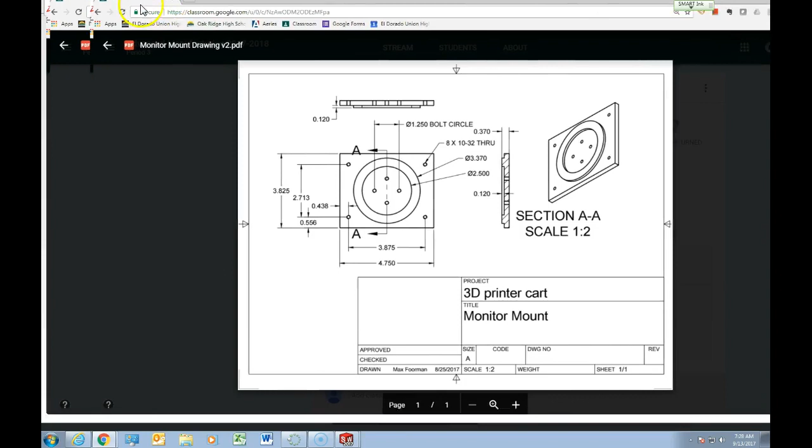So I'm going to assume at this point you know how to open Solidworks. I've opened it here previously. I'm going to do a new part, and I'm working on the monitor mount for right now.

So right now for me, all these are turned off. I recommend at your novice level here, right-clicking on each of those and clicking on the eyeball to make all of these visible. So again, right mouse button on these, clicking on the eyeball to show those things.

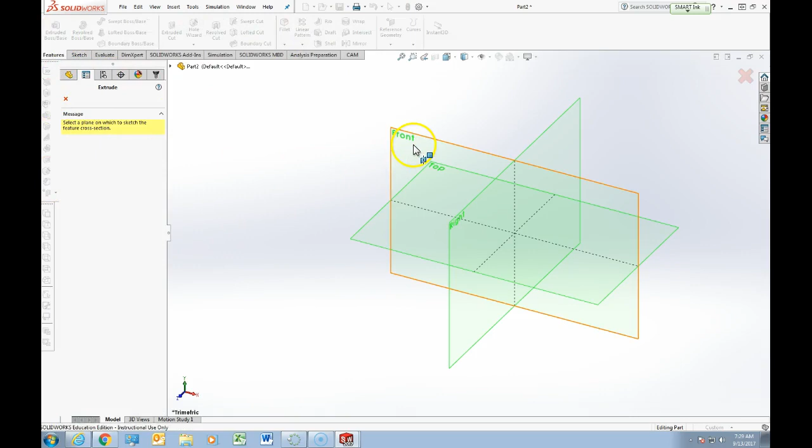The origin's there. So what I'm going to do now is click on Extrude Boss Base off the Features tab. So any of these tabs here, I'm clicking on Features, Extrude Boss Base, and I'm clicking on Front Plane.

Okay, start off here. It's now in sketch mode. That tab opens up. You've got these two icons showing you that you're in sketch mode. I'm going to sketch a corner rectangle. You've got other types of rectangles, but corner rectangle to start is just the easiest to use.

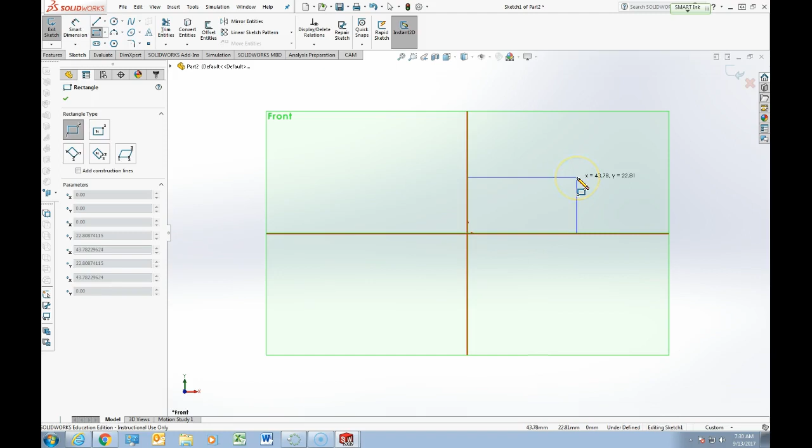Notice how I'm hovering over the origin point right there. We've got a little yellow relation thing we'll talk about later, but going from the origin up and away. And I made a little mistake here to start - you're going to see that my units probably aren't completely right. I'm actually in metric units here.

So let me restart this. I'm going to exit out of this sketch. Custom units down here - inch, pound, second is what I want to be in, and so should you. So you may have made that mistake too. Inch, pound, seconds is where I want to be.

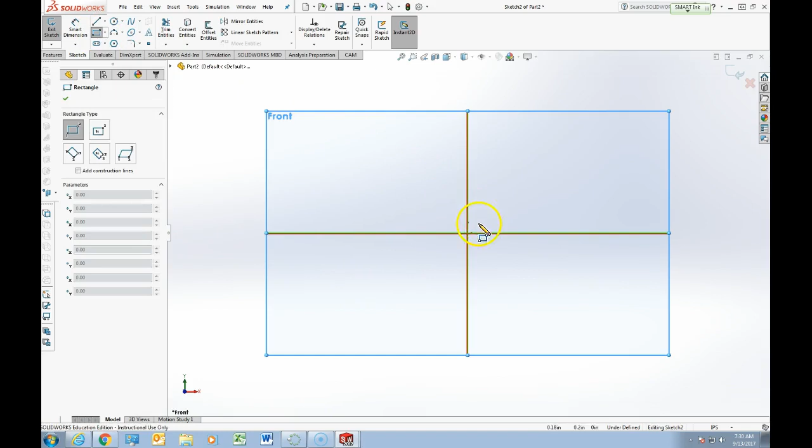Now starting over again: front plane, Extrude Boss Base. Come here, click. Come up here. I don't particularly care where I clicked. That was one click and then two clicks over here to get that.

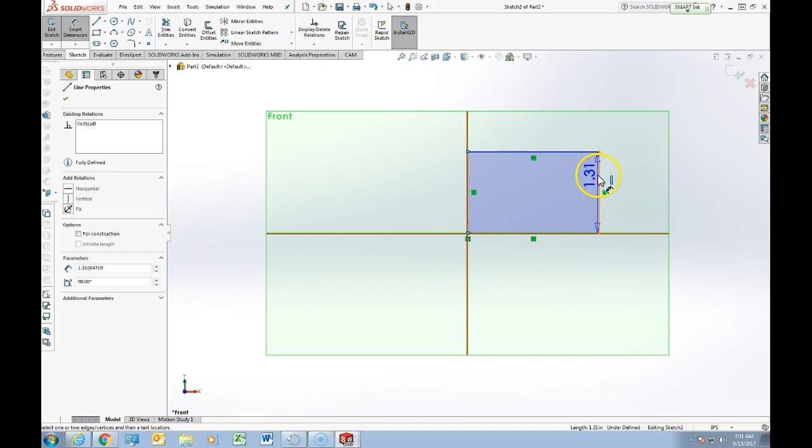Now I'm going to click on Smart Dimension to actually size the rectangle correctly. So I'm clicking on the vertical line once. See how it highlights orange right there as I drag over it? And then I click a third time. So it was one click, two clicks, three clicks to get that accomplished. It's going to be 4.750, and those were left mouse button clicks.

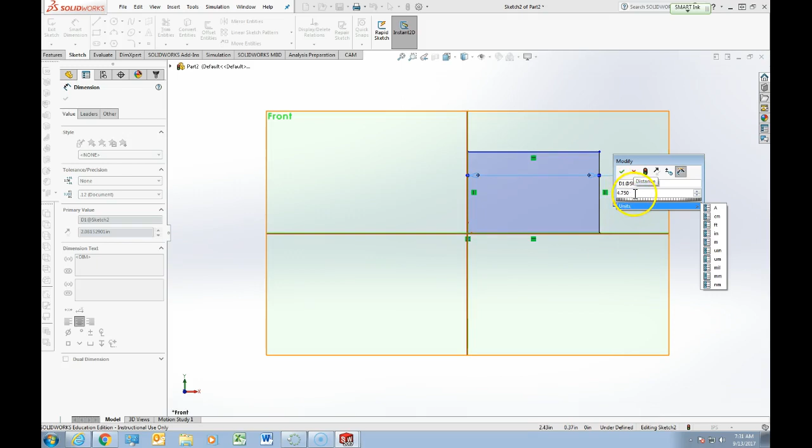Okay, so with that at 4.750, I can click the checkbox right there. Where I got that dimension from was that right there, and now I'm going to be working on that dimension right there, the 3.825 value.

Alright, so to do this one, notice how I hover over that - not clicking anything yet - that highlights orange. That's the line that I want. And the other one I want is down here, that's showing up orange. I click one more time, third time somewhere off over here, and that value was going to be 3.825.

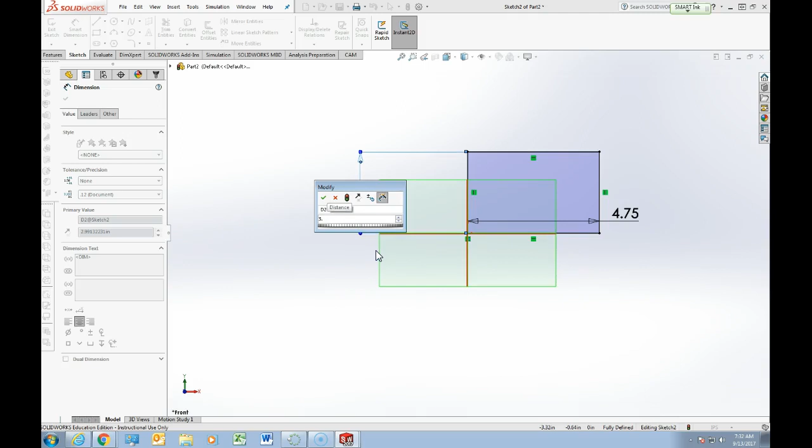So notice that I potentially could have done the same thing. And if I were to try this right now, you're going to see an error that many of you may end up seeing. Notice that I could click on that single line and click one more time over here. I now get this error.

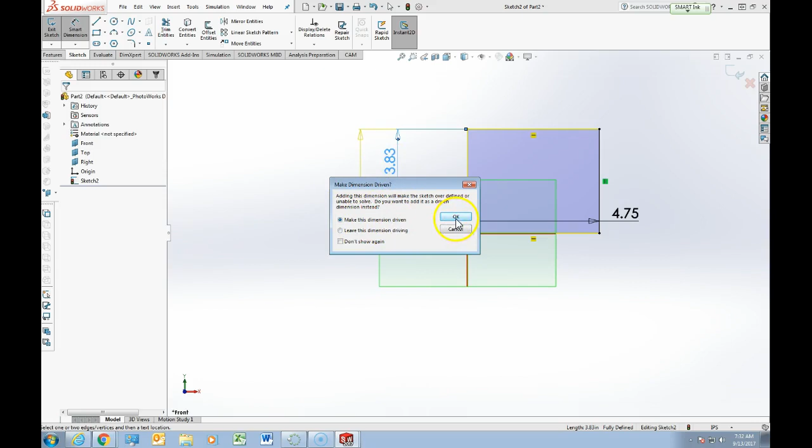This means that it's got too many pieces of information and it doesn't necessarily need this. If you leave this driven, it's going to come out gray right here, kind of gray, and we can't change that value because it's what's called a driven dimension. It'll make more sense potentially later.

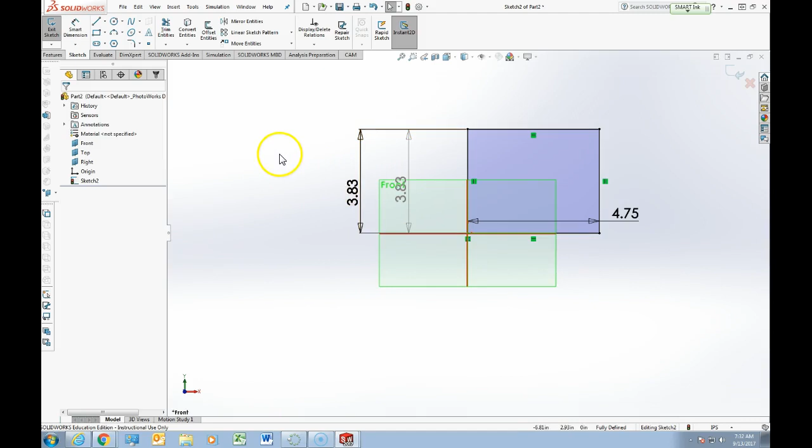But I don't recommend doing just that single line click and then coming out here anyway. There's some things that can get messed up in the long term, so I definitely recommend when you're sizing something like a rectangle, go from one line to the other line and out, one line to the other line and out. To delete this one that I don't need, I'm hitting the escape key. That shows that we've got just a blank cursor. Or you can get back to your cursor by clicking on the select thing up there. I'm going to click once on that driven dimension.

I would like to move it around to make sure, and then I'm hitting the delete key on the keyboard, and that deletes that thing away if you ever need to do that. So you could do the same thing, clicking and holding and dragging. If you just clicked once on it, it's going to want you to alter that value, and if you hit enter, that's not good. So it's actually click, hold, drag, and then you could delete it, or right click and go delete to get rid of it.

But that's actually the value that I want. The other thing over here, I'm going to click one more time on this. Yeah, I didn't want that, so I'll click and hold, move it a little bit.

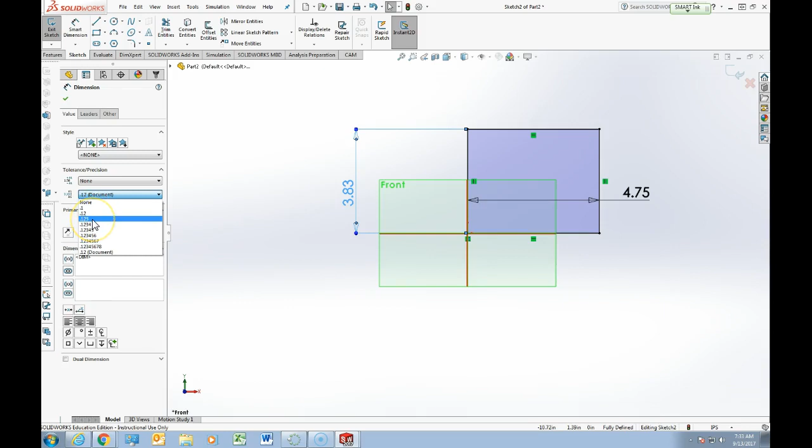If you want to change this to show all the digits here, the way we can do that is off of this document precision, tolerance precision. If I click down there, that changes it to a 3-value place. There's a setting you can do in the background that will default everything to 3 decimal places, which I kind of recommend, but we'll cover that at a different point.

So with that, I'm clicking out of the sketch, and since we started off this feature by doing an extruded boss, clicking on the extruded boss base, when you exit out of the sketch it's going to immediately launch in to ask you how thick do you want to extrude that particular sketch. I'm going to type in 0.370 because that's the dimension thickness, and I'll click check there.

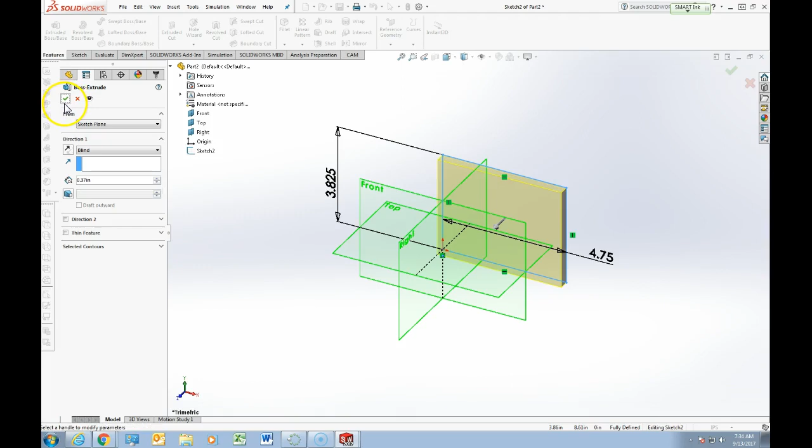And now I have an actual rectangular base feature. So the value where I got that thickness from was right there. All right, so that is the most base feature.

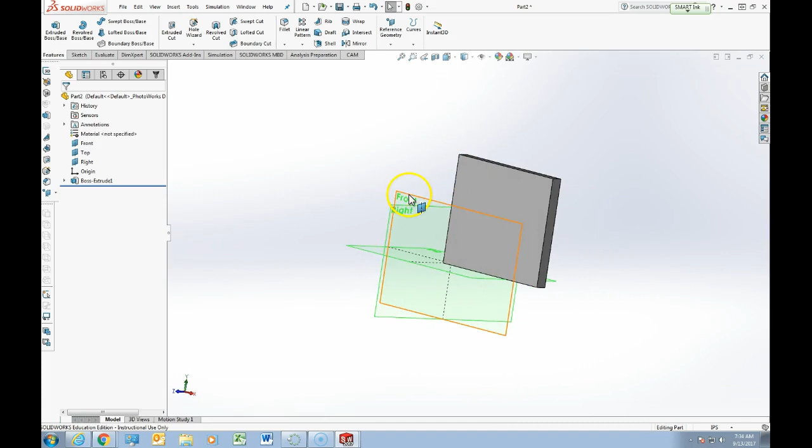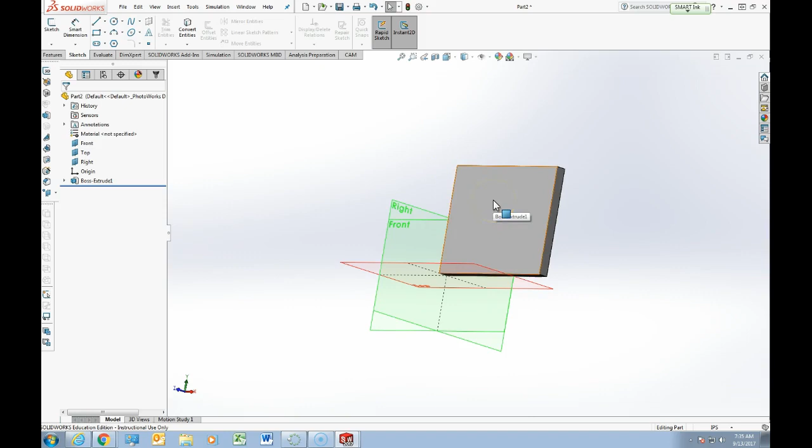I'm going to start now, clicking on this face to start. Notice that I'm not on the Features tab right now, I'm actually on the Sketch tab, and you have this ability to click on Creates a new sketch or edits an existing sketch, and I had previously selected that face. So it automatically launches into sketch mode, but on that face.

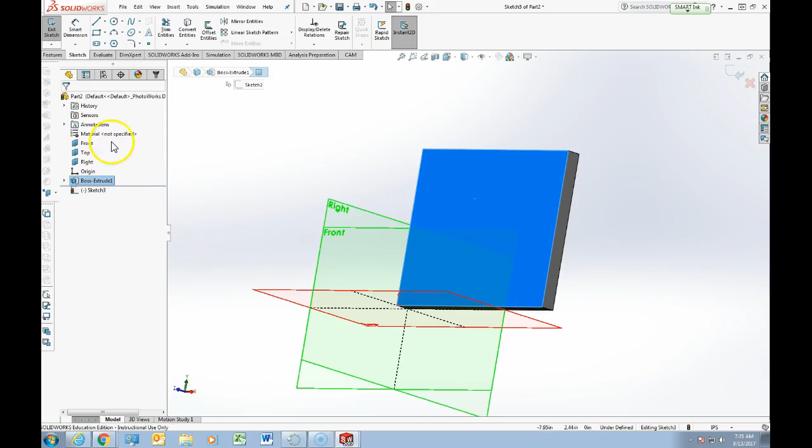Now I'm going to do one other tricky thing here. I clicked on this display view or orientation, and I always like going normal to - notice it says normal to, or control 8 on your keyboard, it has its description right there. So I'm going to click on that now, and that makes me go perpendicular to that.

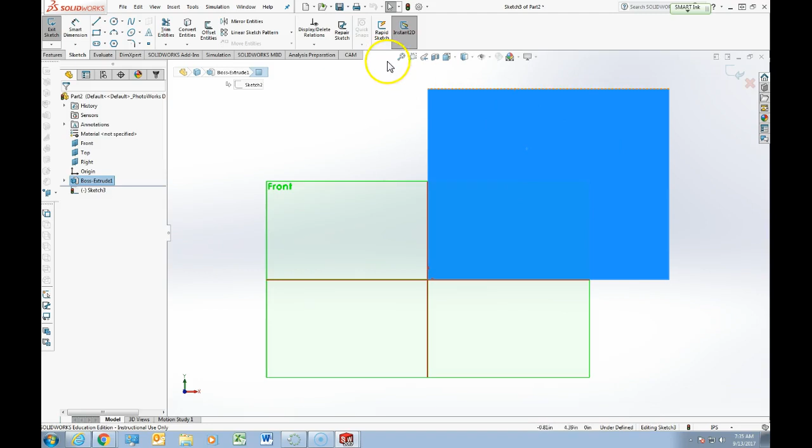This other icon right here, zoom to fit - I kind of already got it centered up. I'm going to hold down the control key on my keyboard and the center mouse button to pan over and do that. Alright, so I am in sketch mode.

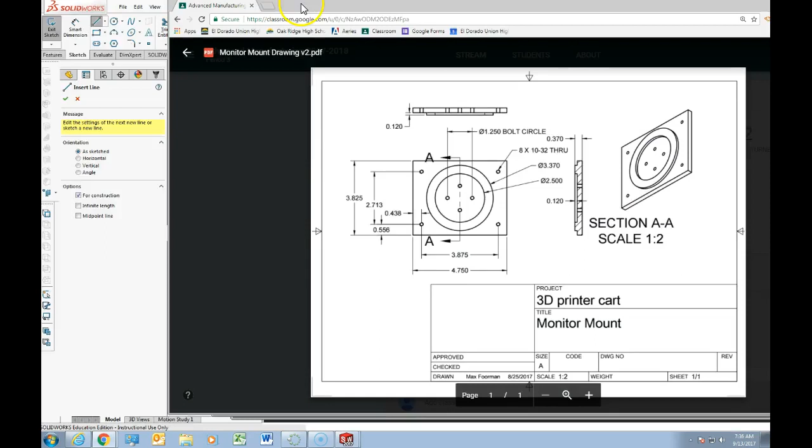Clicked one more time to get rid of that blue highlight. Now, we could just kind of start launching in by sketching a circle somewhere in the center here and get ripping there, but I'm actually going to take a little bit more metered approach. I'm going to click on centerline here, creating construction geometry, because what's implied in this design is that these circles are actually centered and symmetric about the center of that rectangular shape. And with that, that would be called design intent.

I'm going to create some construction geometry that's going to help me always maintain that relationship no matter what. If I decide to grow that rectangle bigger or smaller at some other point, I always want this to be on center. So notice how I went over that - that little icon right there means midpoint. This icon, as I drag across, goes now coincident - that's what that yellow thing that just popped up means. It's horizontal and coincident, that line.

I'm now going to double click, and now I've got what are 2 center lines, and how I got to center line was that right there. It's also going to show for construction, same thing. But now I've got these construction or center lines going from the midpoint on that line to there, midpoint there to there. So that always geometrically is going to lock in that that point right there is the center of my rectangle.

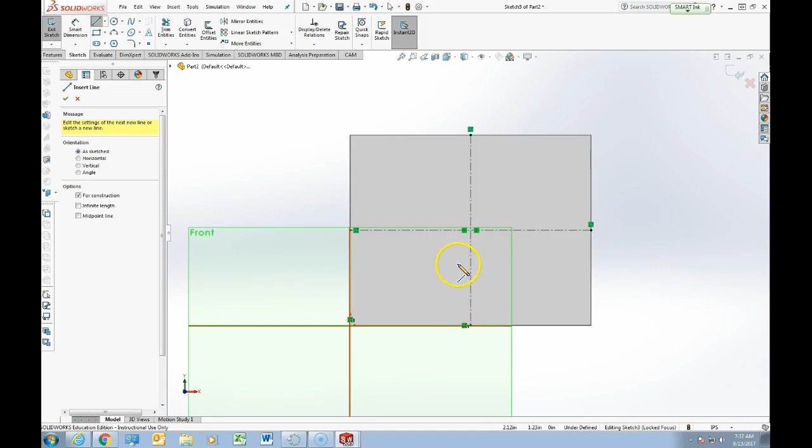Now I'm going to come in and do this circle thing. I'm going to do a center point circle, and guess what - now that I do this, I know that I'm dead on center. And I'm going to do another circle concentric to that one on that point.

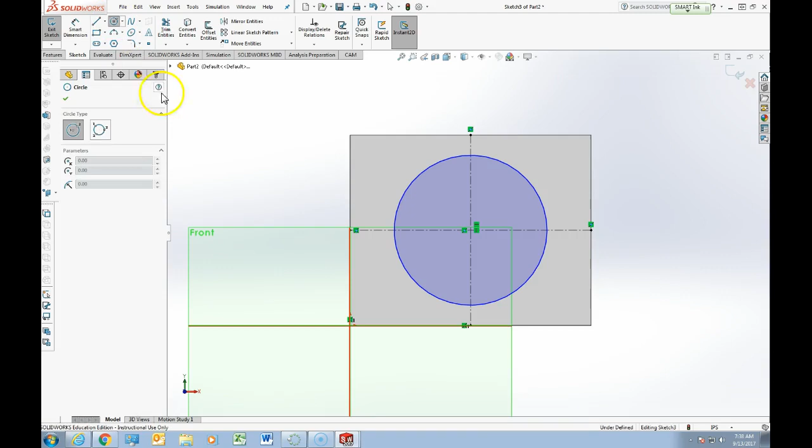And now I have always got two circles dead on right there. And if you somehow missed, if you created a circle even off over here somewhere, I'm going to hit escape.

Notice that so long as these items are blue right now, you can actually modify them in ways. This one's actually locked in about that center point. That's what those things are, relationships locking it on center. This one right here, however, is free to float because it's not locked to anything else. You can also change the size by clicking and dragging on the circumference.

But what you can also do is I'm clicking and dragging this. Notice how it went there. That would snap to be on that circumference there, but I'm still holding down my left mouse button and I'm dragging over here, and now I'm releasing, and that dropped that circle onto the center point here. So I literally clicked and dragged and held from the center point, and now all I can alter about these things, I can't move these now because they're locked in, but I can alter the diameters.

And now I could click on Smart Dimension there, but I'm going to show you this other cool thing that SolidWorks calls a mouse gesture. I'm right-clicking with my mouse, holding down the right mouse button right now, and now I'm actually moving my cursor up slightly. And now it gives you this menu thing, oops, that's a circle.

That would actually start sketching a circle right there. That would start sketching a rectangle. But what I really wanted actually is Smart Dimension. So I'm going up top there a little bit. Oops, that didn't take, it still got the circle icon on there. But now I moved right mouse up and then released going in that direction, and wow, it got Smart Dimension for me right there with a mouse gesture.

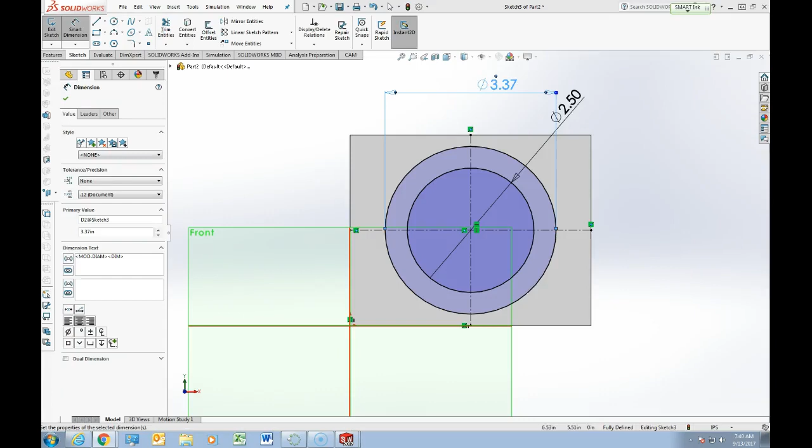All right, so we've got those two. Notice how the sketches were blue before, now they are black. They are locked in place. They cannot be moved. They are fully constrained.

Now what I'm going to do is I'm going to exit out of this sketch. Notice that we have sketch 3 here. I'm going to show you now, many times I've seen people get to this point and go, oh no, what do I do? How do I extrude? Why isn't it giving me anything?

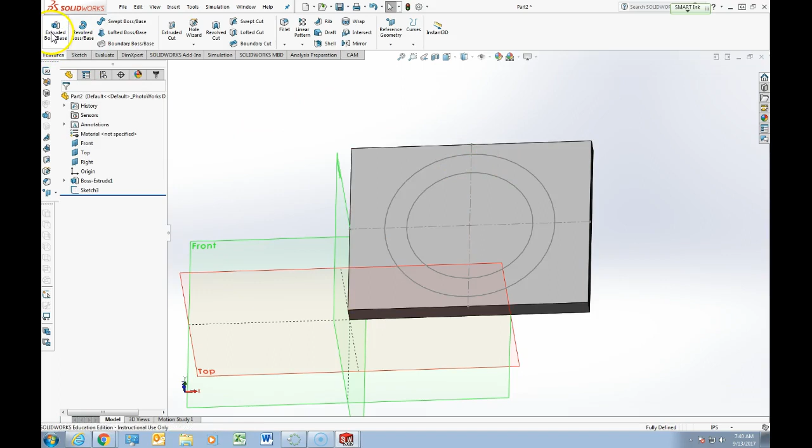Well, you've got your sketch. If you were to click on Extrude Boss Base right now with nothing else highlighted, I've hit my escape key, so nothing right now is highlighted at all or selected in the graphics area. I'm going to click on the Extrude Boss Base from the Features tab. Now it's asking you, select either a plane or a planar face or edge on which to sketch the feature cross-section.

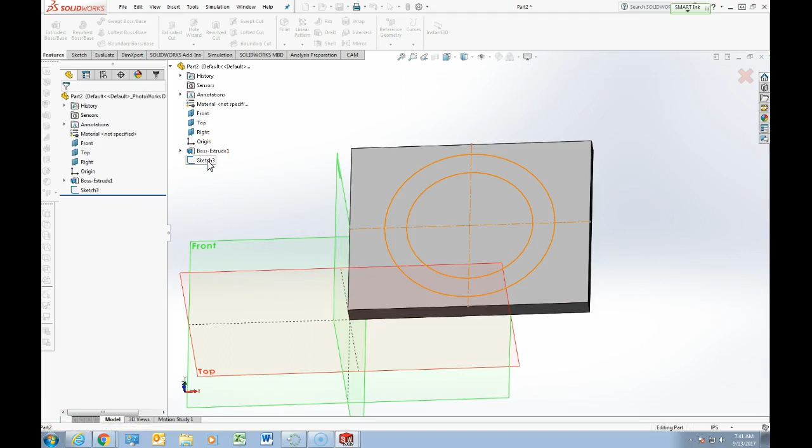Well, we don't need that now because we already have the sketch. So the second option is an existing sketch to use for the feature. Well, guess what? This thing here is called the feature manager flyout or something like that. If you click on that triangle, left click on that, and come down to sketch 3 and click on that, now it realizes, okay, you want to extrude that sketch, and now it's asking, well sir, how far do you want to extrude it?

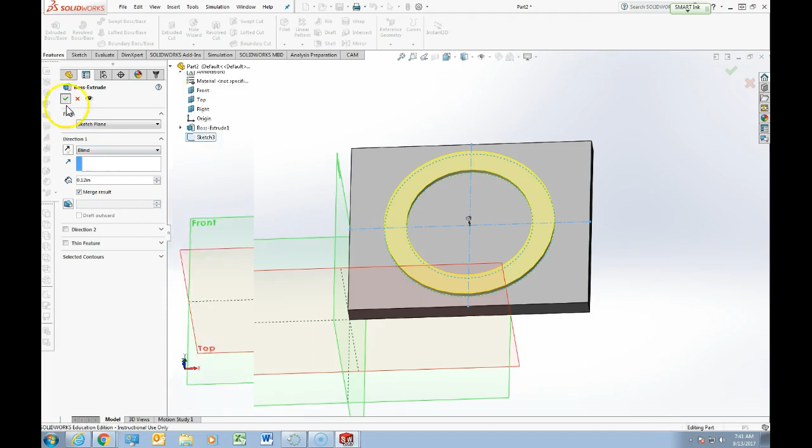And in this case, it is 120 thousandths of an inch deep that I want to extrude that. I click OK, or check right there. I click one more time, and now we've got our boss extruded up. And so that was this dimension right there.

Okay, so that's the first bit on this part. I'm going to save this now. I would save this, yeah, I've got my SolidWorks curriculum folder, I like where that's going to. So I would do, I'm going to call this monitor mount, and I'm putting my name next to it, Mr. Foreman. Cool, now I would click save.

Notice that that actually changed there. Up in the top there, I always get uncomfortable when I walk around the room and I see you guys there with a big asterisk right next to it, or generic part number. That means you hadn't saved. You're walking a tightrope without a net. So there we go, first little bit of this part.